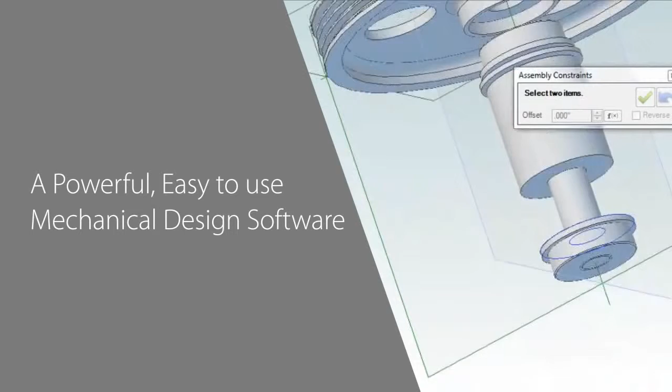Geomagic Design gives designers and engineers a powerful, easy-to-use mechanical design software to make amazing products. In this video, you'll see how this professional CAD software from 3D Systems lets you create, assemble, validate, document, and render designs for 3D printing and every other manufacturing method.

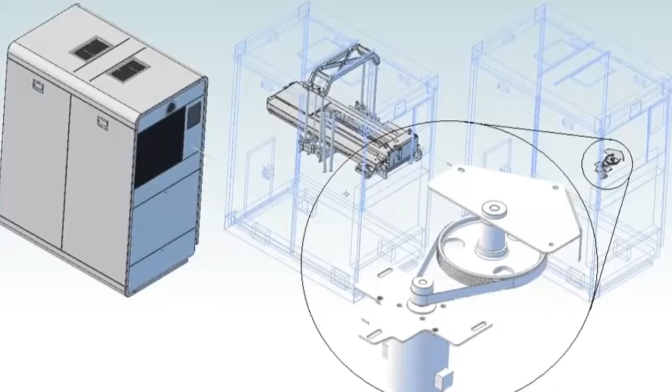Let's take a look at how easy Geomagic Design is to use, even when handling data from large and complex products, like this 3D Systems ProJet 3D printer. Our ProJet printers have thousands of parts, and in this example we'll be working specifically on the pulley assembly that controls the motion of the printer's build platform. Let's start by designing the pulley wheel.

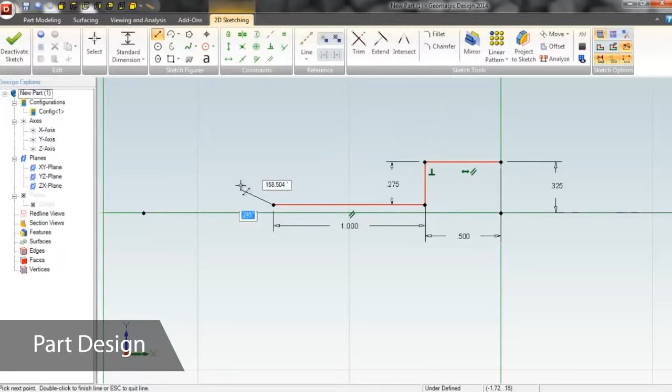Most design begins with a sketch, and Geomagic Design's sketching tools are awesome. As we place entities, we can constrain dimensions and relationships to other entities on the fly rather than add them in later. Contextual menus predict what you'll need at each step, making the design process faster. We'll revolve this sketch around a central axis to create the wheel as a solid body.

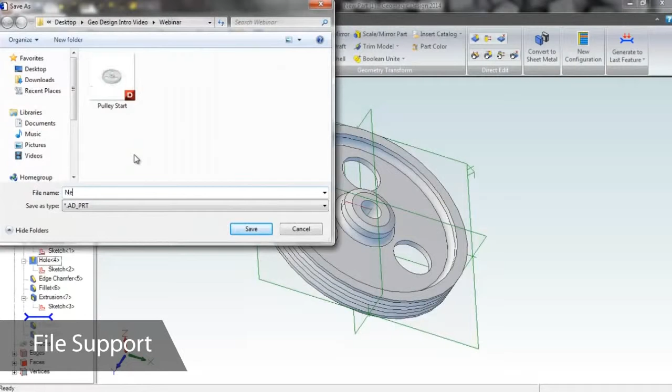Once we've added finishing touches like fillets, chamfers, and patterned holes, we can send the part to the assembly module to begin to build a functional virtual model. We designed our own wheel, but Geomagic Design provides access to part libraries featuring millions of standard parts, so we could have also used something off the shelf.

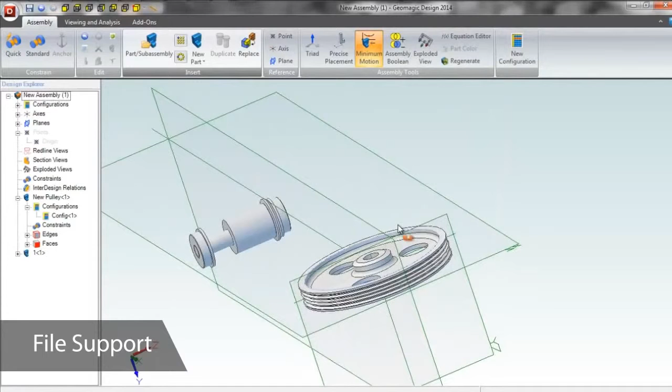Now let's add another part to this assembly by importing it. Geomagic Design can import almost any CAD file, whether standard or proprietary format, so incorporating parts from almost anywhere into your designs is easy. The software can also directly edit features on any imported solid, so let's change the radius of this hub that was created in another CAD package.

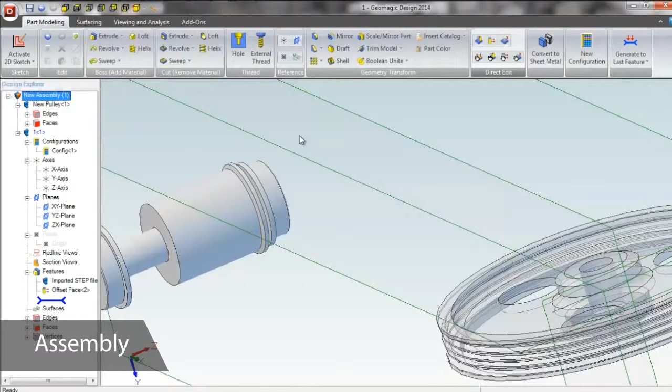Assembly constraints are extremely intuitive. For this hub, all we have to do is select the two faces or reference geometries, and Geomagic Design's Quick Align tool completes the alignment automatically, and then keeps us in the tool to select the next alignment type.

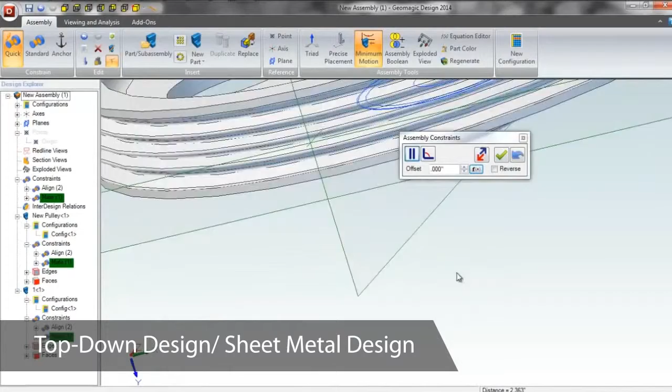If you want to use an assembled file to guide the creation of new parts, Geomagic Design supports top-down design. We'll add a new sheet metal part into this assembly and use geometries from the existing bodies to help place it.

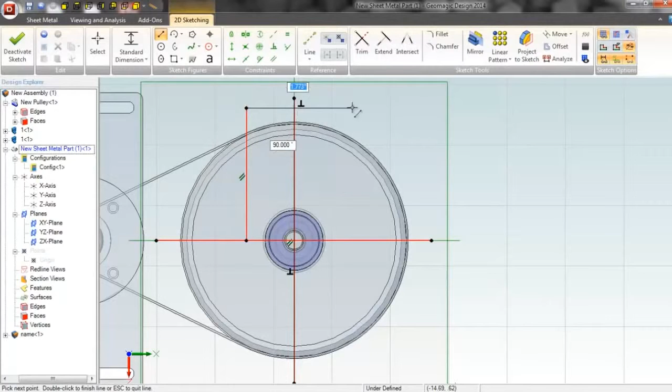Since everything is history-based, it's easy to go back in and edit objects to add features or edit dimensions manually, or use the Design Dimensions option to bring back any dimensions we used when creating the file.

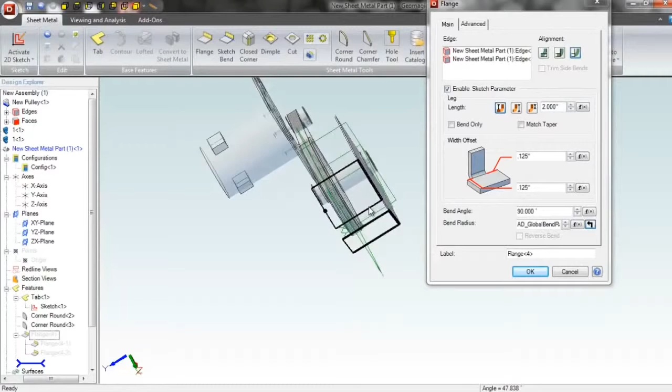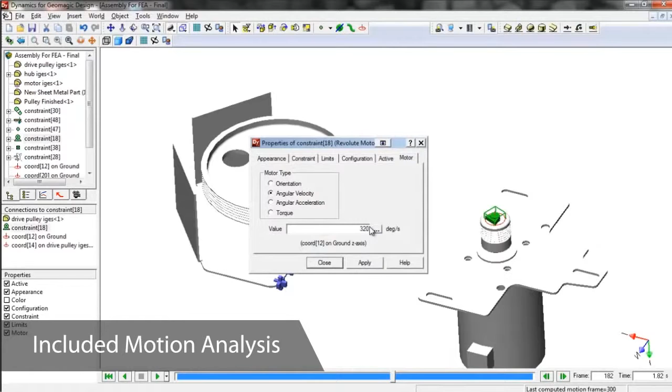To confirm that our pulley assembly will perform correctly, we can use Dynamics for Geomagic Design, a motion analysis module included with the software. All of our assembly constraints carry over from the assembly, so we don't need to recreate them. In Dynamics, we can add motors and joints, watch how the assembly will function, and analyze acceleration and interferences before we make our first prototype.

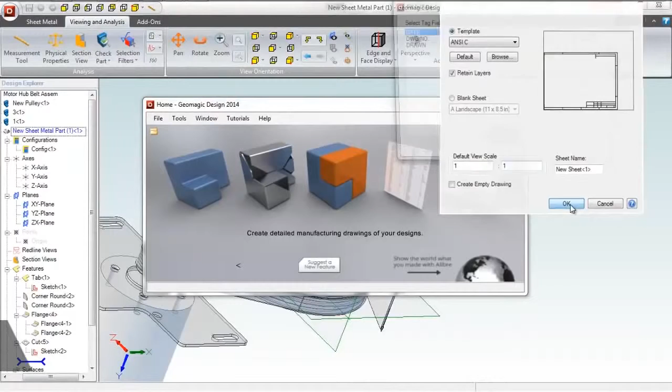Once our new part is finished, we can go back to editing the assembly and save the new part. Geomagic Design can link the parts we've created to an engineering drawing to document it for manufacture. It's easy to select drawing templates and add standard views. If it's a sheet metal part, like this, we can add a flat pattern view to see how the object looks before it hits the metal press.

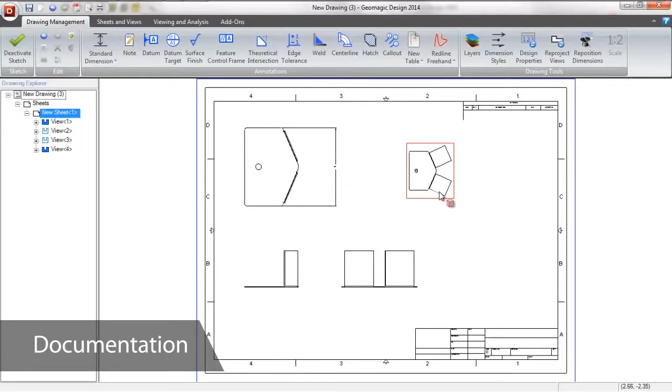This view can also be exported as a .dwg or .dxf file to send directly to a laser cutter or plasma table. Datums, dimensions, GD&T callouts, and other annotations can be added to the document simply by selecting the edge they apply to. The best part of this is that the drawing is dynamically linked to the model, meaning that as parts evolve in the iterative design process, the document updates in the background to reflect any changes made.

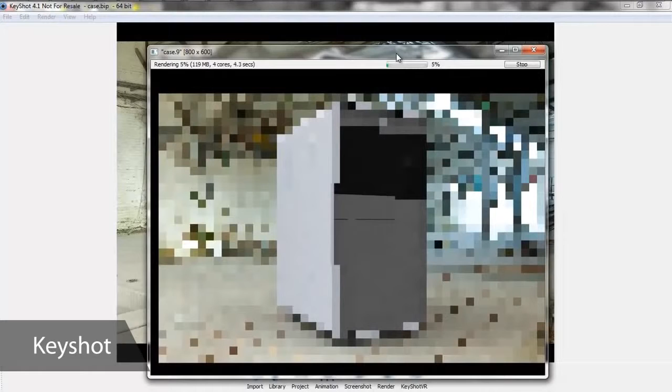Now that we have a finished working model, Geomagic Design gives us the option to save as a KeyShot file so we can apply photorealistic rendering to add materials, scenes, and lighting for that finishing touch. Since Geomagic Design is made by 3D Systems, printing your designs as prototypes or end-use parts is easy. Exporting print-ready models takes just a few clicks.

No matter what you're making or how you're making it, Geomagic Design is the easy-to-use, powerful mechanical CAD software that will help you make amazing products.